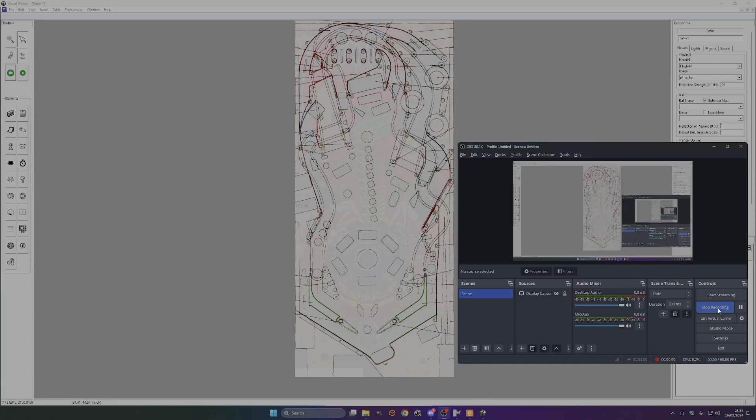Okay, right, walls. So what we're going to do is start making some walls. We know this one here is a wooden wall, or we're best guessing it is. So we can literally just get that and drag this into shape.

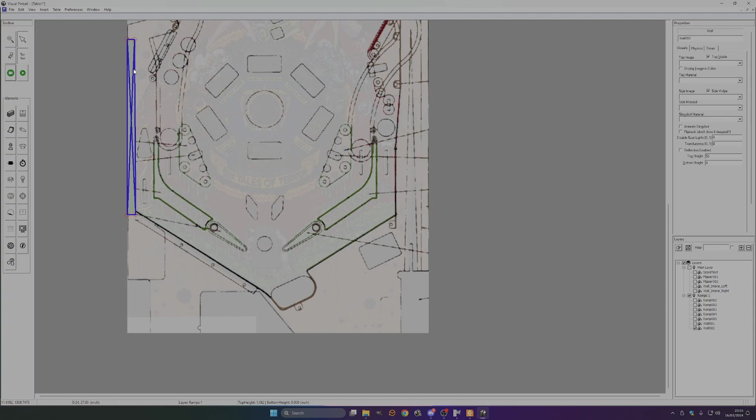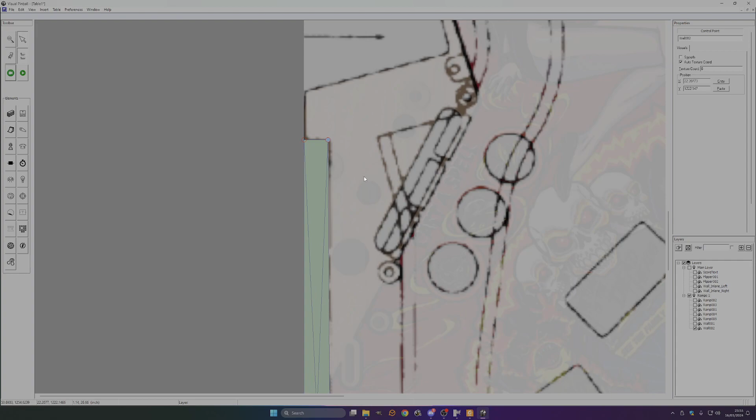Square. Not square, rectangle, long square. We can do what we did before about this, lock it into position. We know the two left-hand side ones are 0 on X, which is the edge of the table. And on the Y, where are we at? 22. So I reckon at 23, follow the edge. 24 is a bit better. Make the same height.

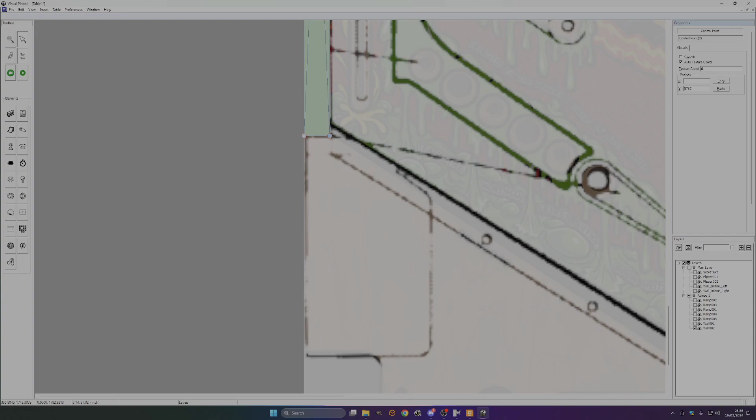Down here, bottom height, 1782. At 5... ugh, that's not right. Okay.

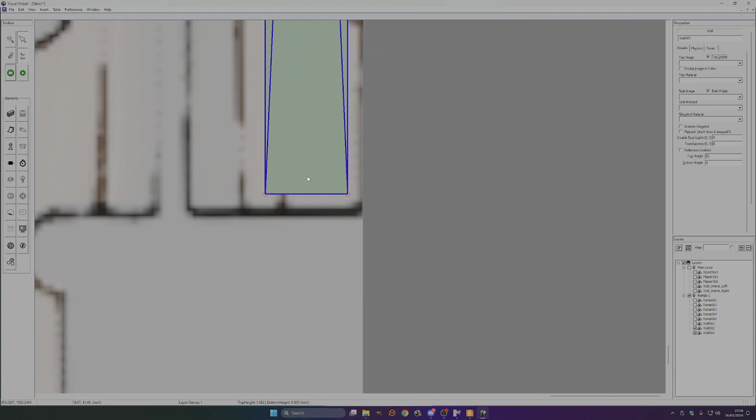As I did before, take that, copy and paste it, drag it over because there's one over the other side. What you can do here is line it up at the bottom, about there. But if we look, this one's much taller. This one goes all the way up to here. So that's probably about

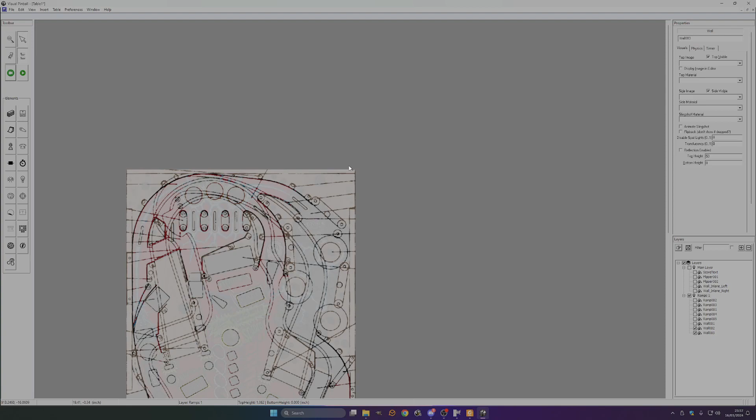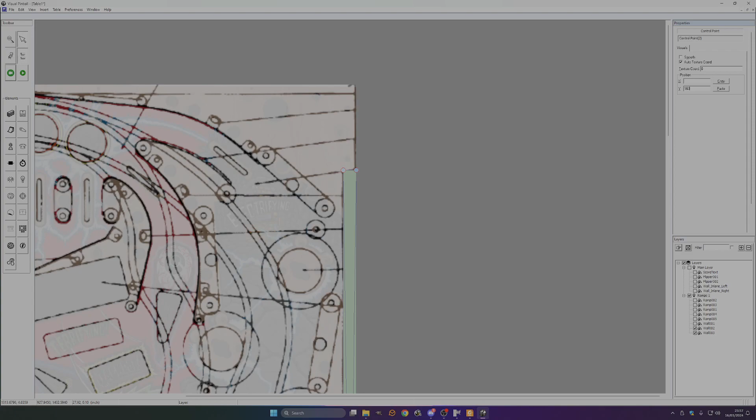80 off the top. So rough guess, say Y is 80 - oh no, it's a bit more than that. 100, 120, 140. That's miles off, I'm rubbish at this. So it's 160. Right, so that's that wall on the right hand side.

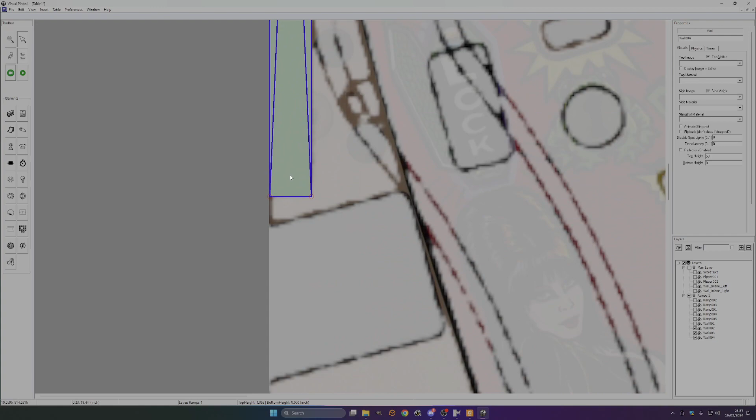You've got another one up here. So you can take this wall, copy paste it again, drag it up here, position it in the same position. What was that, 160, wasn't it? Oh, this one's in a slightly different position. 165.

Then we've now got our walls. Now we've selected, so we can select all three, click main layer, and make sure they're moved into there.

Okay, now we can start thinking about making the metal rail guides. So these are a little bit tricky, they're a bit like making ramps. So we're going to do the big orbit.

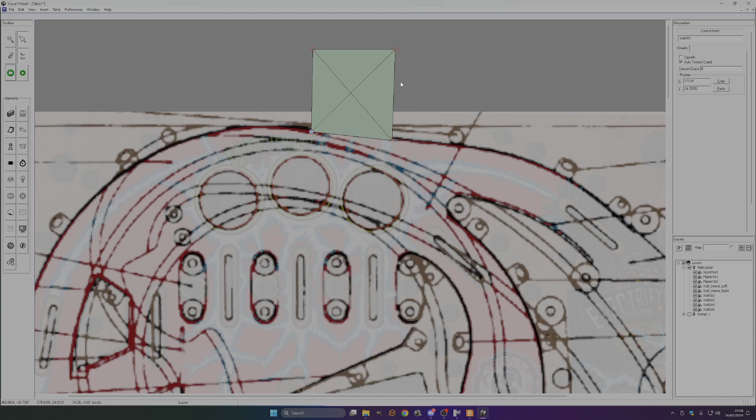Best way to do this really is start from the top. You want your outside edge of the box to be there. We're not going to worry too much about the other side yet. The control point - what's probably best to do, a cheap way of doing it, is dragging the two box control points right out to the side. Add these control points and just draw around the edge.

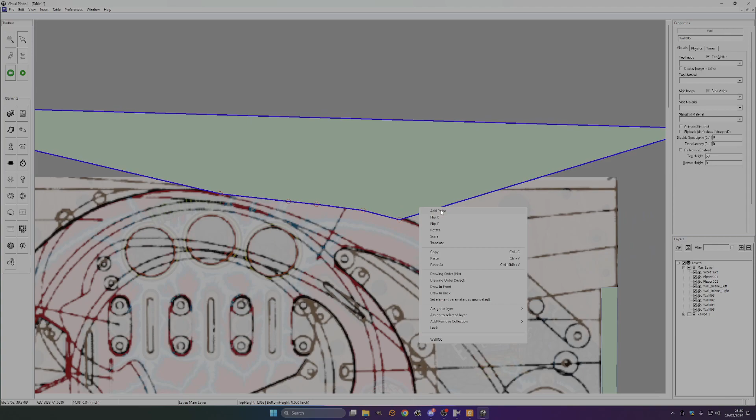Drawing these walls all the way around. Takes a while to do, but you get the hang of it after a while. And like I say, you can start off rough, getting the rough shape for your sanity's sake.

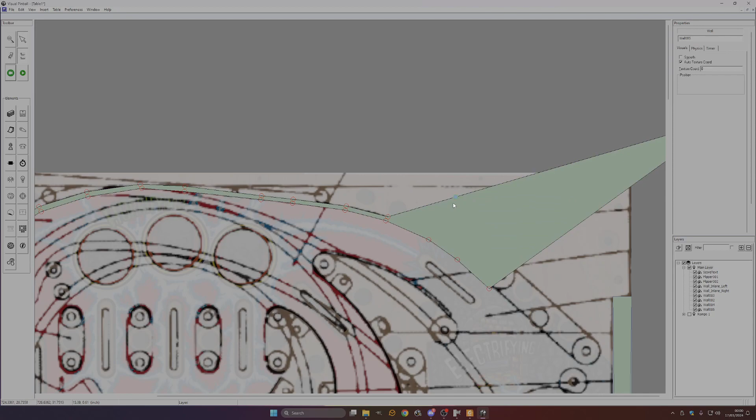Now, do this side because this is finished. We're going to just close that one down there.

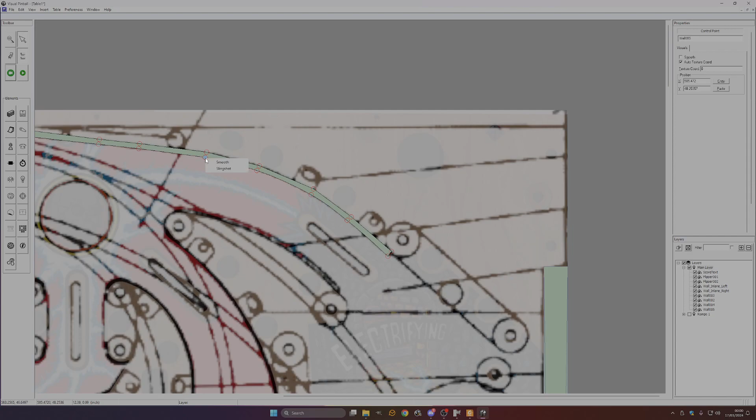Make these smooth, so we need to go through and make all these smooth. The outside ones don't really matter because the ball's not going to actually touch the outside wall, but the ones on the inside definitely need to be made smooth so that you get a decent transition around the curves, so the ball doesn't sort of clunk and bang around it.

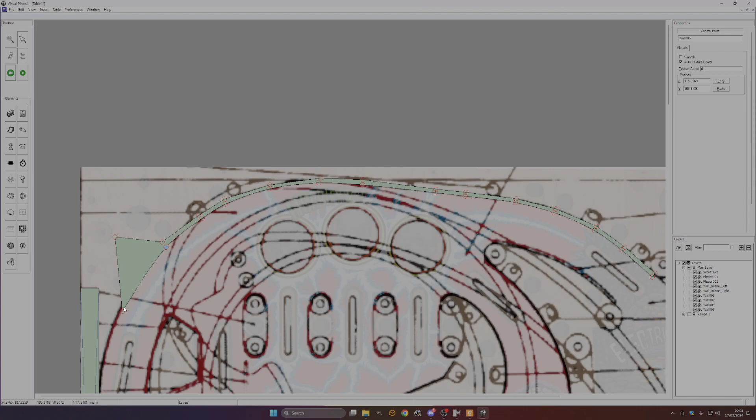Okay. You can do it though. I do it because it just basically looks a bit neater in the long run. Drag this out here because it just gives me more to play with.

Right, so what you tend to find in a lot of tables is you'll get to a point where it follows and traces one of these wooden walls. So instead of making this smooth, you leave that as straight. Go down to the point where it starts breaking away again.

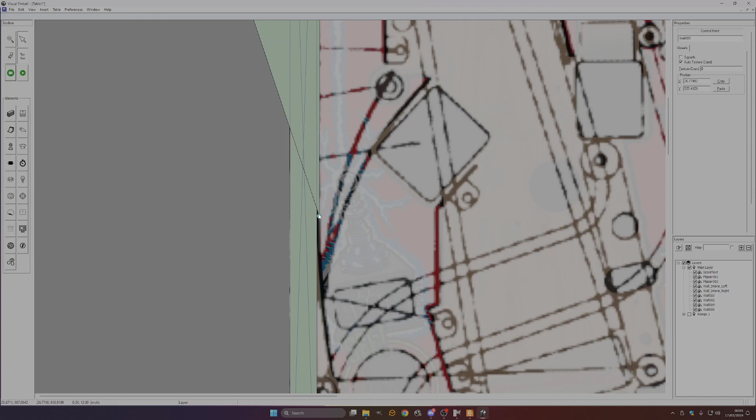And then do the thing we did before with the control points and go, okay, what's this - 27.3, make that 27. Make this one 27 as well, so that transforms straight. And then carry on.

Add a few more of these to bring that round.

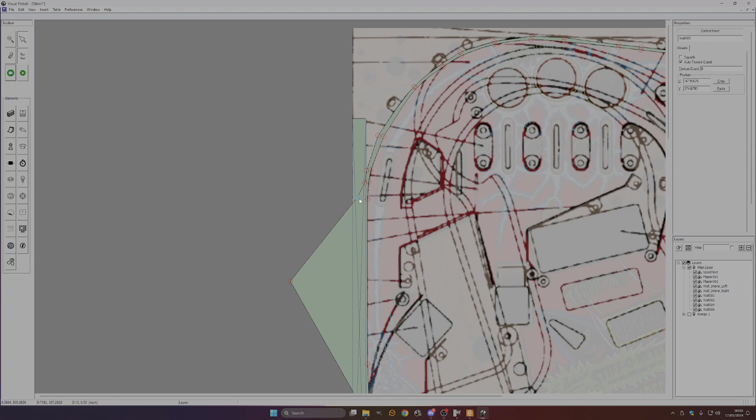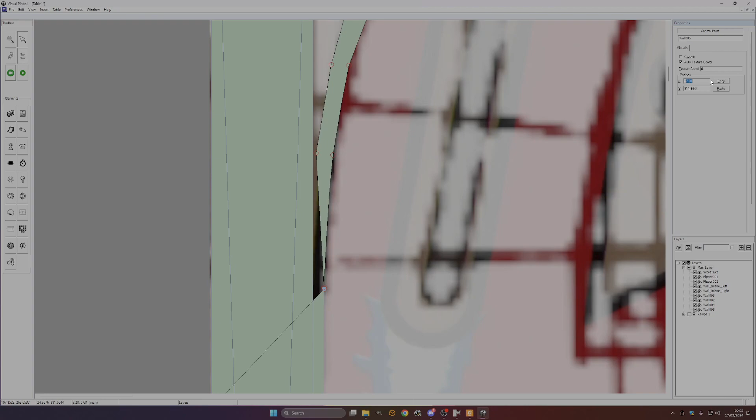Now if you're making this a visible wall, you want to make sure that these don't overlap, and that this straight bit is just - if we know that wall there's 27, you can make this control point 27.01. That's not right, it's 24, wasn't it? 24.01. Now we've moved that across. So, yeah.

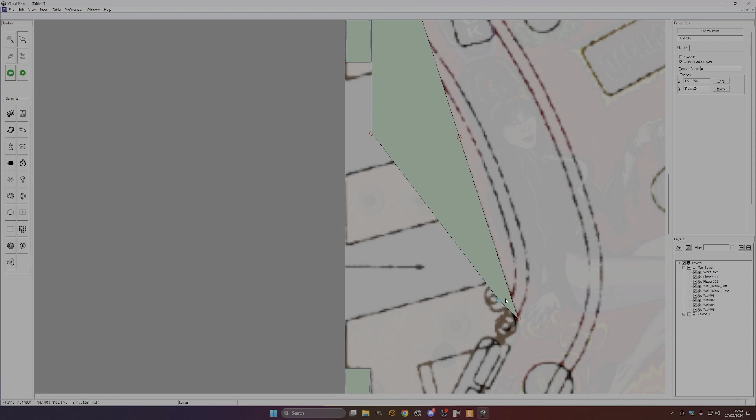Making more walls, and we're nearly there. And we're there. And remember, this is all still rough stuff - we've yet to cross-reference the diagrams to figure out exactly where these things are. We're literally just building this roughly to make sure we've got the right shape.

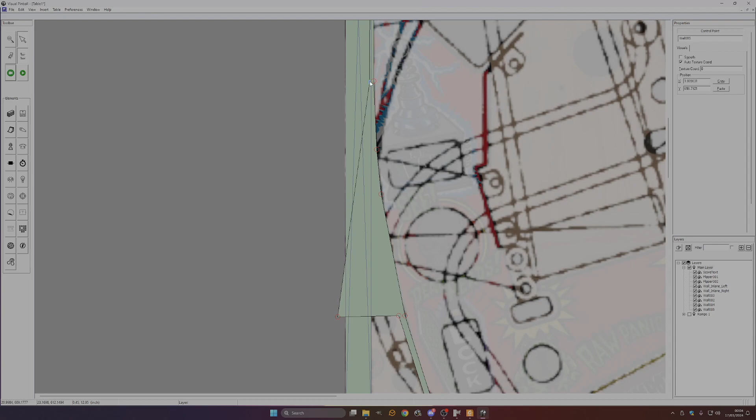Yeah. Right, want to match that there. Then lock it. Go around and make all these smooth that you didn't. Obviously, we need to keep that one straight.

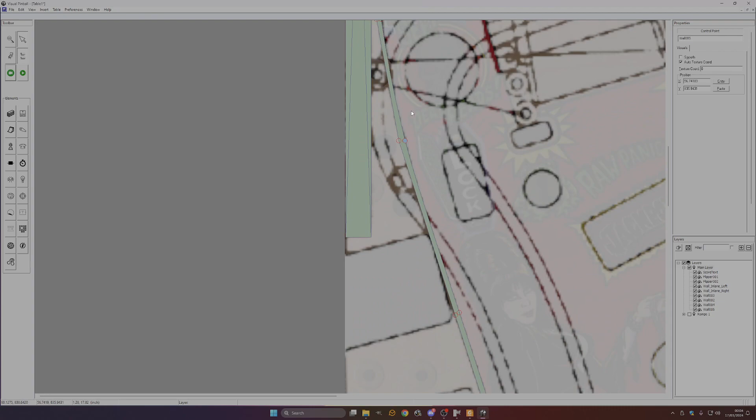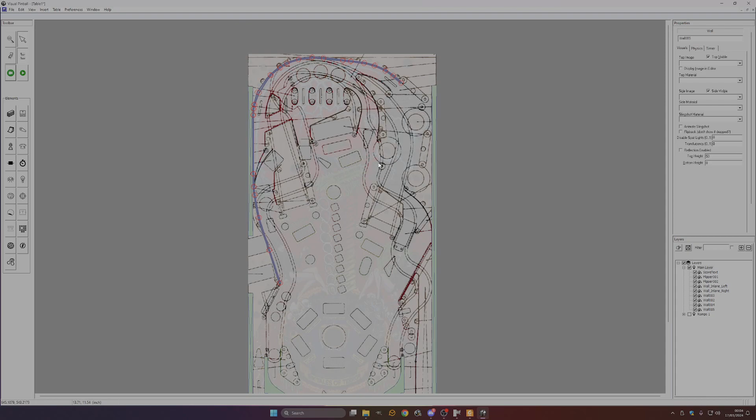So you've now got your - get rid of the playfield - you've now got your outside wall, your rough outside wall. So all you do then is you go and do that with all of the rest of your walls. So you've got this one here, and that.

I'm not going to build the apron because I'm going to go and transfer some stuff across from the VPW example table to do that. But this is just to show you roughly how to do a wall, an orbit wall, from scratch, and then you can tidy it up to your heart's content.

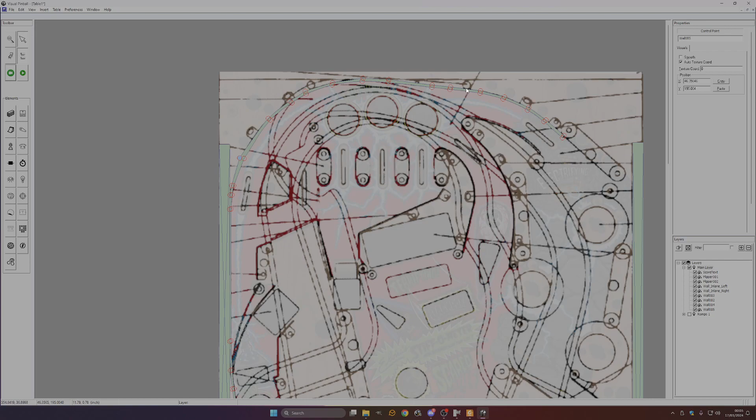I'm going to make this go over though because it's really bugging me. Ooh, you can click on it and use shift, and if you use arrows left and right, it moves it one bit over. If you use shift left and right, it moves it over a chunk. So I'm just going to make it a bit more flush with the wall because it was bugging me.

Okay, so that is orbit walls and wooden walls.